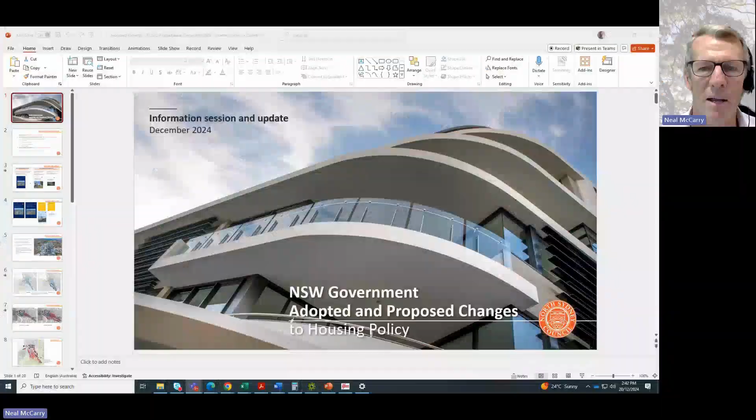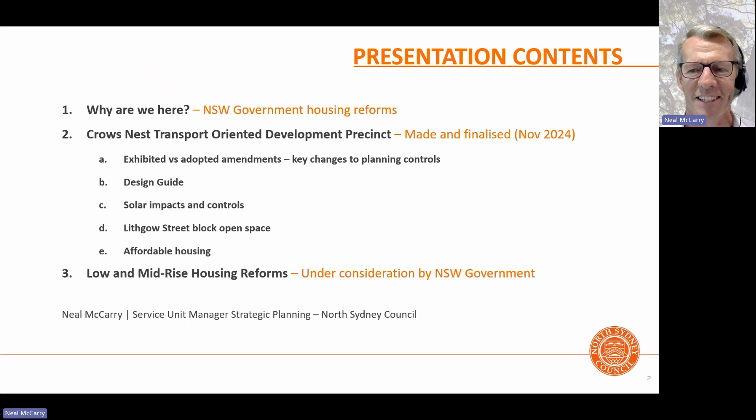During this presentation, I'll be outlining the government's broader housing reforms and focusing on the recent amendments to the planning controls that have been made, covering the headings you can see on your screen now. The team and I are also working on a more detailed analysis of the potential impacts and issues arising from these amendments, which we'll be presenting to a meeting of Council next year. So this presentation is an overview and summary of the changes, and more information and a critique will be available after our analysis is complete. So why are we here?

In 2023, the Commonwealth and states set a target to build 1.2 million homes over the next 5 years. The New South Wales Government committed to delivering a target of 377,000 of those dwellings, with the majority to be provided in metropolitan Sydney. The State Government more recently set a target of 5,900 new dwellings for the North Sydney local government area. As part of this broader program, in December 2023, the Department of Planning introduced the Crow's Nest Transport-Oriented Development Program.

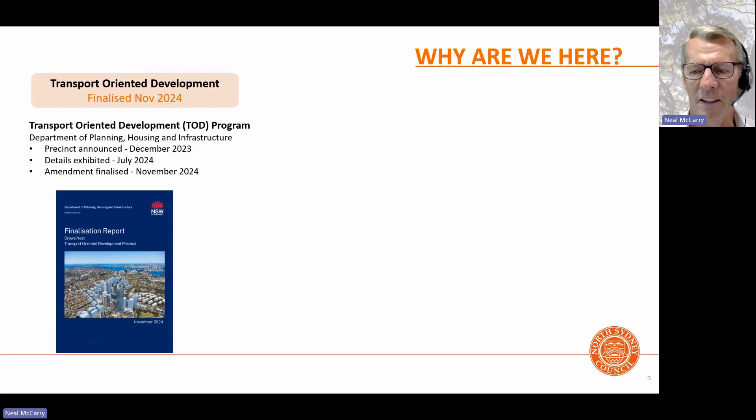And that's the focus of today's presentation, along with a short piece on the low to mid-rise housing reforms that was also introduced.

In August this year, Council endorsed a detailed submission in response to the exhibition of the Crow's Nest Transport-Oriented Development Program. On 27th of November 2024, the State Government's transport program for St Leonards and Crow's Nest came into effect. As a result, amendments have been made to North Sydney Council's local environmental plan, along with our neighbours in Lane Cove and Willoughby Council areas.

The North Sydney Local Environmental Plan is the principal legal document that regulates and controls the scale and type of development that is allowed on a piece of land. It is made up of a written legal instrument and a series of maps.

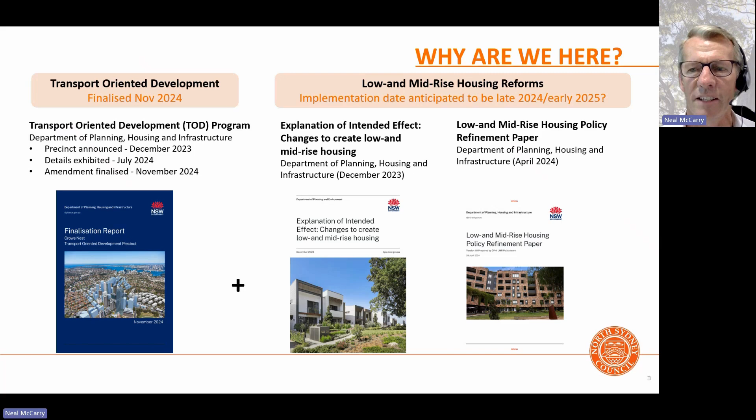Links to these more detailed documents are provided further in this presentation, as well as in the video description and the web page where you're watching this, for those who may be interested.

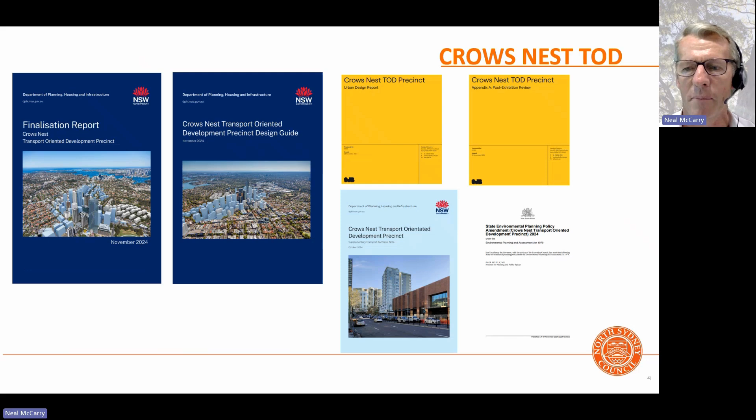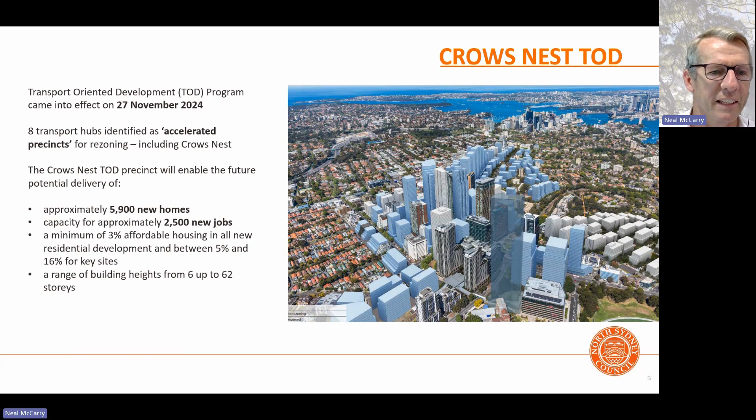This slide contains some high-level numbers and a summary, and these figures also include parts of Lane Cove and Willoughby Council areas. The image you see is a 3D representation of potential built forms that could arise under these planning controls. To get your bearings, this is a view looking from the north, and this taller line of buildings is looking down the Pacific Highway. This graphic shows you the potential built forms and the scale that could arise. Those are the ones largely shown in light blue, and the coloured buildings are ones actually already in place on the ground.

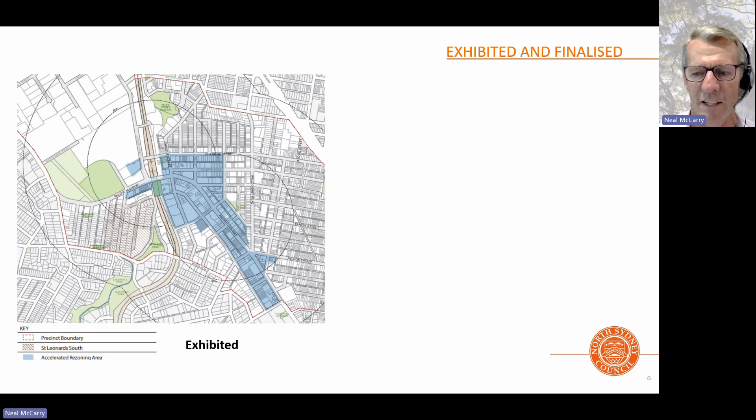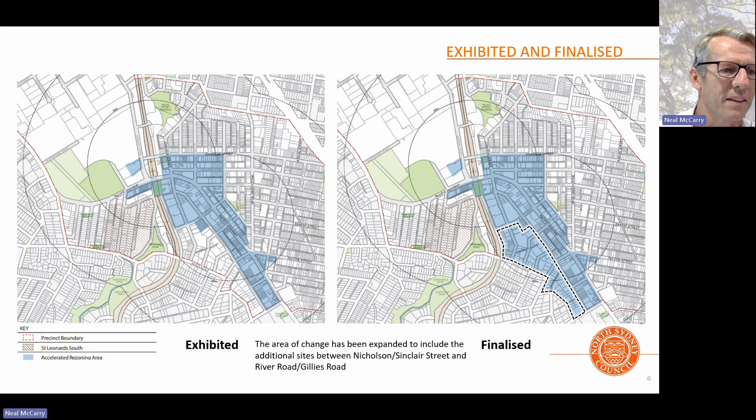The next slide on the left of your screen shows the area shaded light blue that was exhibited as part of these proposed amendments in July and August earlier this year. On the right, you can see the finalised extent, and importantly, this includes, as shown by the dotted line, an additional area that was included following exhibition. This area extends down Oxley Street, down Lithgow Street as far as River Road, and then further south along Gillies as far as Rocklands Road, and then up through Sinclair and Nicholson Streets. So these areas weren't the subject of public exhibition, but were included following the exhibition.

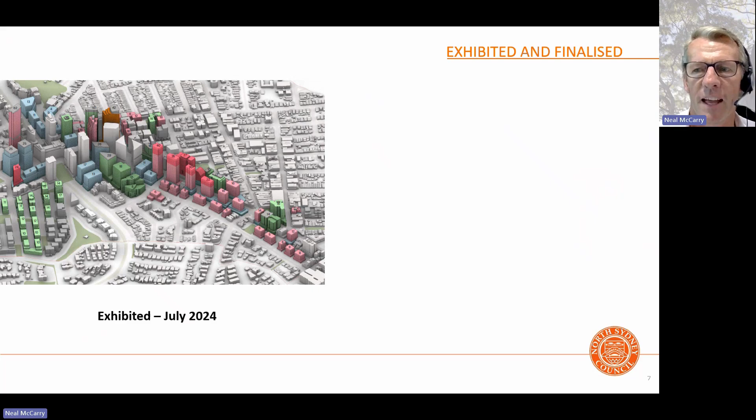This slide on the left contains a snapshot from the Urban Design Report. Again, this is a 3D representation of potential built forms as exhibited that could occur as a result of planning control changes, and to the right is the finalised extent. The numbers, if you can read those - I apologise, they're a bit small, I've got a closer-in slide coming up shortly - show the height of these potential buildings expressed in stories. This image can be found on pages 11 and 12 of the Urban Design Report.

Again, to get your bearings, this is an aerial perspective taken looking towards the northeast, with the Pacific Highway being the corridor of taller towers, where you can hopefully see my cursor moving. The area I mentioned that was included following exhibition, compared to the image on the left, is here - down Lithgow Street, River Road, this full extent - up Shirley and up to Nicholson as well.

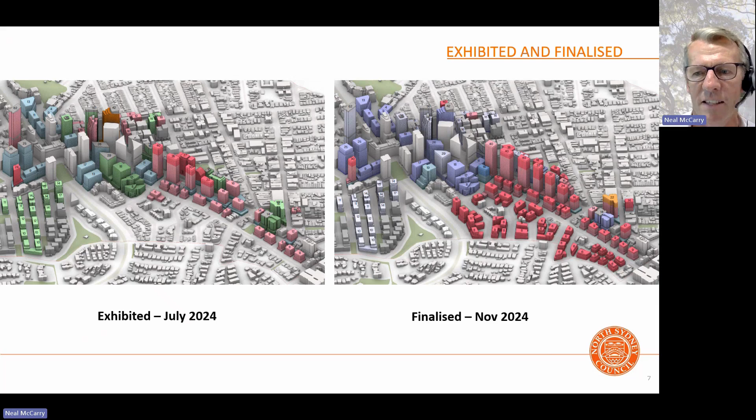As you can see, apart from those areas, a number of the sites also underwent significant building height increases beyond those exhibited. The light pink, if you can see that, is what was exhibited, and then the darker red is the finalised heights that were set as part of this finalisation.

This slide is showing you the building heights. These figures, if you can read them, are expressed in metres. I've included these maps rather than the finalised ones in the local environmental plan itself, because they're a little bit easier to read. But just for absolute clarity, the effect of these amendments has amended North Sydney Council's local environmental plan. We'll provide a link at the end of this presentation and on our website to where you can find those technical maps in the LEP.

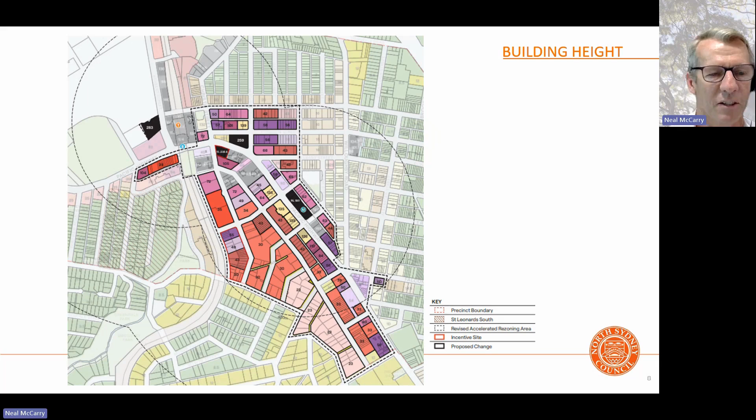This slide is floor space ratio controls that have been implemented. Floor space ratio is a planning term used to control density. It sets a maximum total amount of internal floor space that can be provided on a site, expressed as a ratio based on the site area.

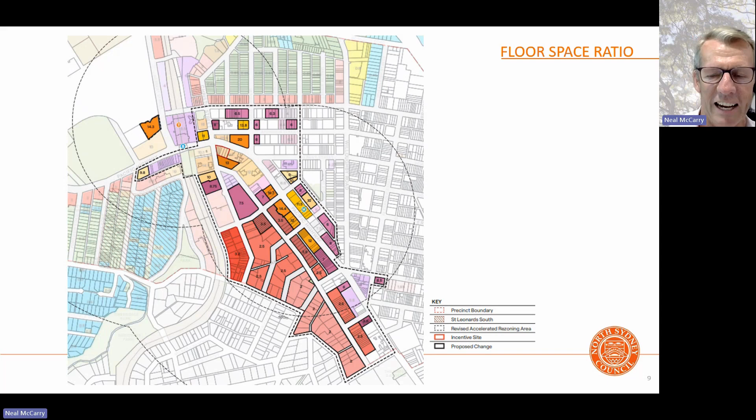So for example, if someone had a 1,000 square metre site area and a floor space ratio of 2.5 to 1 applied, they could potentially achieve a maximum total floor area across the different levels of the building of 2,500 square metres. Similarly, I've included these maps rather than the finalised ones, as they're a little easier to read. The non-residential floor space ratio.

Non-residential floor space ratio is similar to the last slide in concept. However, this relates to the non-residential uses on land in the mixed use zone. So when I say non-residential, I mean things such as shops and offices and that type of thing. This is set as a minimum on these sites, meaning those uses would generally be provided at the lower levels of the building, with residential units above. So just for clarity, these coloured and annotated areas are all the mixed use zones in this precinct.

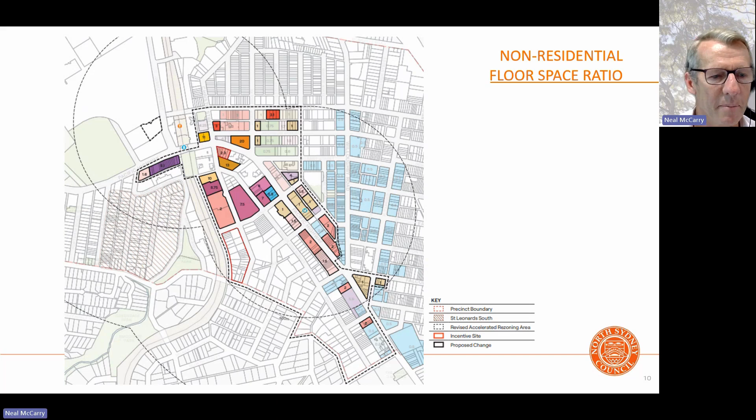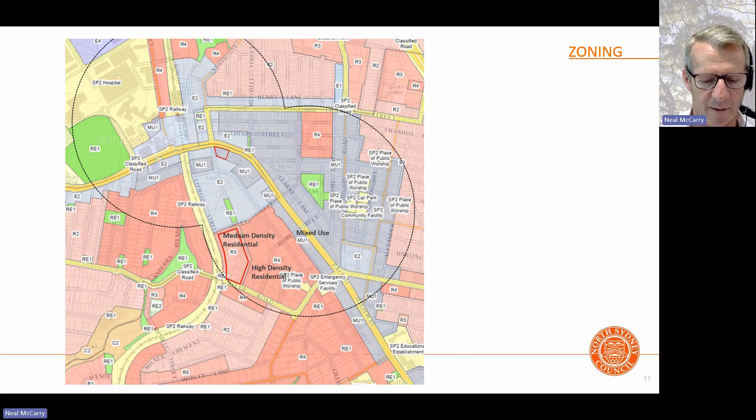Next, we have the zoning map. Apologies for this graphic, it is a little busy, but this is an extract from the amended zoning map in Council's local environmental plan. Most notably, this R4 high density zone is extended to a much greater extent than was exhibited, shown as the darker red zone. The zoning of the majority of the areas as exhibited remained unchanged, such as the mixed use extent, that's the light blue through there. And I'll come back to it, but this block here, circled in red, didn't undergo a zoning change, though there are some specifics I'll talk to shortly.

This slide is showing a zoomed in extract again from the Urban Design Report that the state government released, from page 25 for those who may wish to look at that. This provides a bit more detail and clarity on the degree of change between what was exhibited and finalised. Again, to get your bearings, this is taken from the southwest looking sort of northeast, and the line of tall buildings is that made permissible potentially under these changes, that's the Pacific Highway through there.

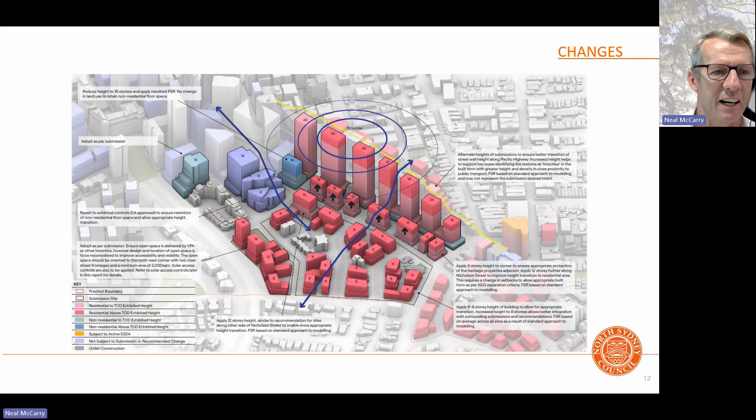And then the area I talked about here, this is Oxley Street, if you can see my cursor, Lithgow Street, River Road, this is going up Shirley, and then this is Nicholson. So that area was all added in as well. Again, the light pink colouring is the heights that were exhibited, and the darker colouring there is what was made following exhibition and finalisation.

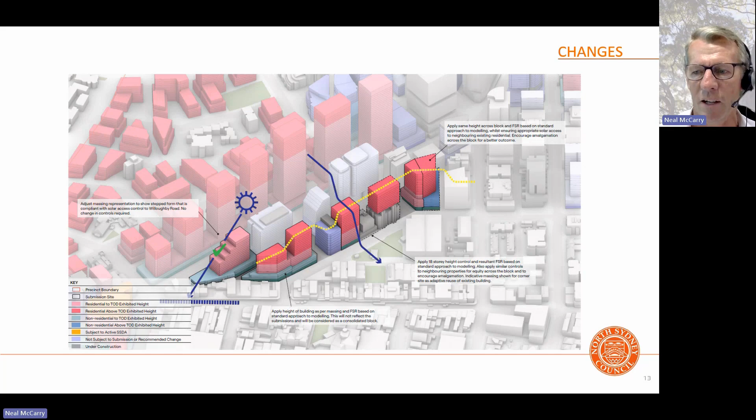Next up, we have an extract from page 33 of the Urban Design Report that provides a bit more detail on the difference between what was exhibited. To get your bearings here, this is a view looking from the southeast, and this taller line of buildings is the same one I just showed you on the Pacific Highway. This purple building here is the new Crow's Nest Metro entry point. These lighter coloured forms here are the potential building forms being progressed over the station by way of an application. The light pink, again same coloration, was what was exhibited, and the red is what may now be permitted under the new building heights that have been included.

The state government, in making these amendments to Council's local environmental plan, also finalised a precinct design guide. The precinct design guide contains numerous more prescriptive provisions to guide the final future built form on individual sites. It has the same effect as Council's current development control plan, but doesn't mirror it by any means. I've listed a few of the things it tries to deal with on the slide. The point I want to make is that the design guide is actually referenced in Council's local environmental plan, and that requires new development to be consistent with these design guide requirements.

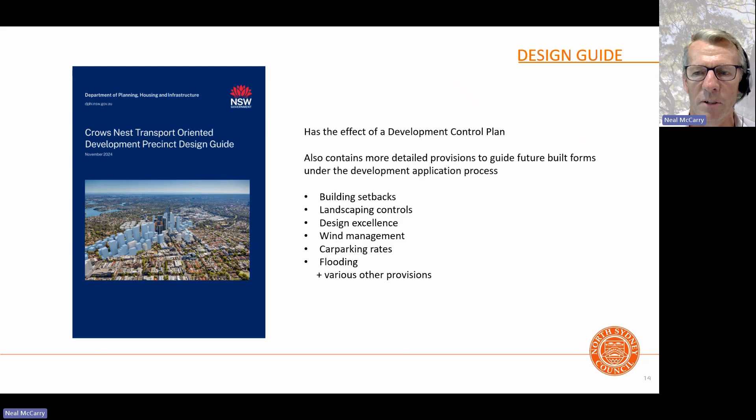One of the key impacts of taller buildings of this nature is the shadows they cast. We don't yet have detailed shadow modelling available, but this diagram is presented to try and illustrate the extent of overshadowing that may arise from some of these taller building heights. If we take this building here as an example, there under the LEP is a height limit of 125 metres assigned, which would accommodate potentially around a 40-storey building.

In midwinter, when the length of the shadow is at its greatest, the shadow length is generally around 3 times the height of the building. So a building located on this site, if developed, could generate a shadow in the morning hours up to 375 metres long, which would bring that shadow right down south of River Road, potentially.

As the sun makes its move through the sky, that shadow would arc around and shorten as the sun gets higher overhead. Similarly, these slightly taller, shorter, and then further shorter buildings would also cast shadows, but of a lesser length.

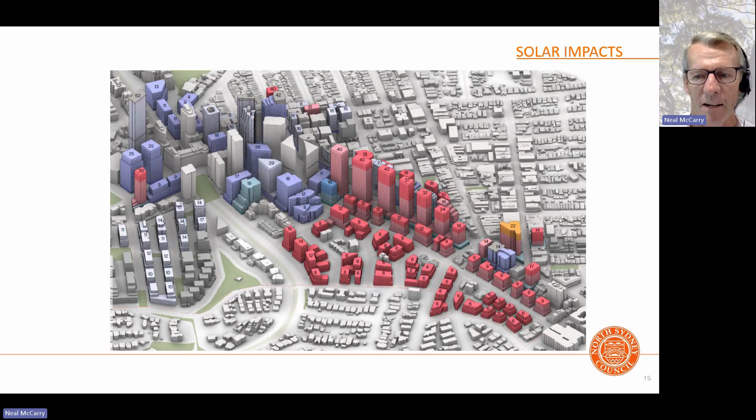This table dealing with solar controls is an extract from the design guide. The left-hand column identifies the area over which some solar protections are applied, and the right column specifies the requirements new developments need to comply with regarding solar access or protection of these areas. You can pause the recording to review these in more detail.

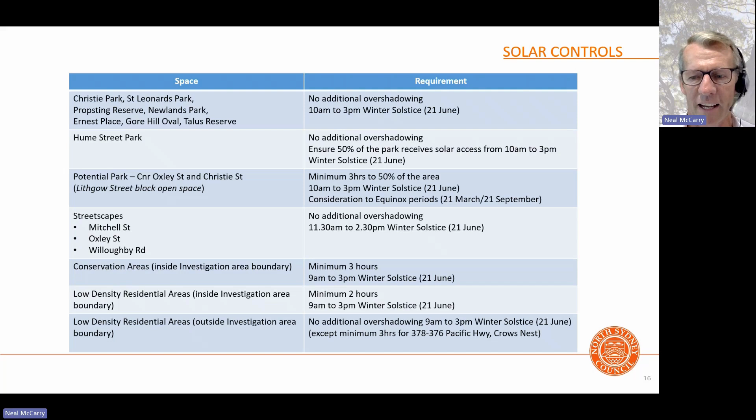Just raising the point, we haven't yet tested these, but the team will be reviewing this along with the modelling of these impacts in more detail over the coming weeks.

This slide is also an extract from the design guide issued as part of the finalisation, showing the block of land bound by Lithgow Street, River Road, Christie Street and Oxley Street. With a combination of provisions within the local environmental plan, termed incentive provisions, as well as specifications within this design guide, one of the aims of these amendments is to deliver a new area of open space available to the public of at least 2,000 square metres.

The built forms, shown in blue outlines, are indicative. This amendment is simply a planning control and doesn't have the effect of approving an actual building. However, the heights annotated on this diagram show the maximum height that could potentially be achieved on these parcels of land within this street block.

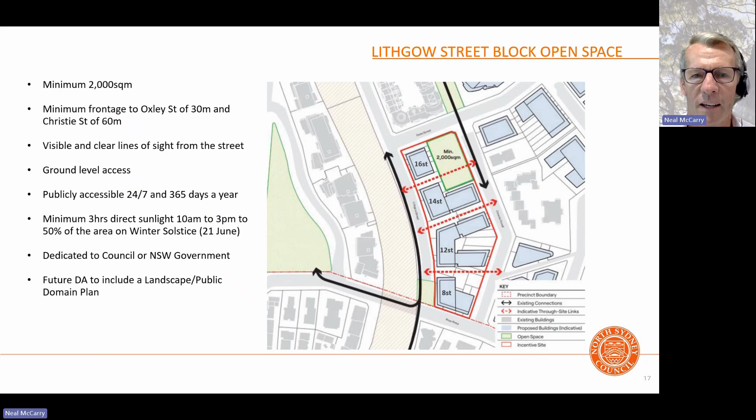One of the government's cited objectives of the transport-oriented development program was to increase the supply of affordable housing. Affordable housing is housing priced so that households with low to moderate incomes can afford it, as well as meet other basic living costs. It's usually available for rent at a discount to the market rent for similar properties in the area, and quite a number of eligibility criteria apply.

The area shown in this map hatched in blue will be required to provide a minimum of 3% of all new development as affordable housing. Some sites, as marked up there, have a higher requirement for affordable housing, a higher percentage to be delivered for any new development as affordable housing.

So those are a summary of some of the key elements of the recent changes to Council's planning controls that I hope have provided a level of clarification in the short term.

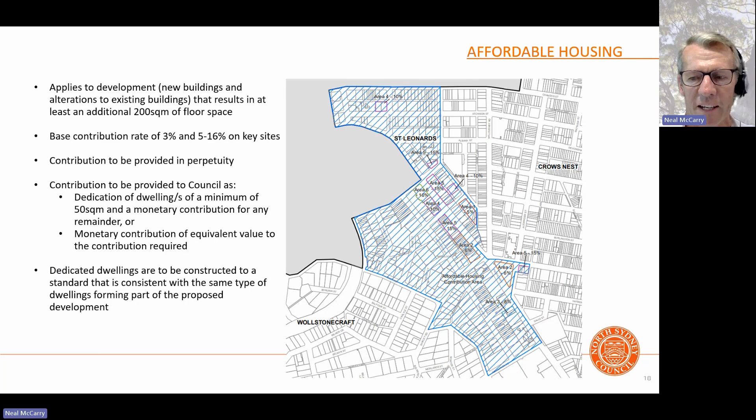As I mentioned earlier, the low and mid-rise housing reforms will also result in changes to development controls in many areas of the North Sydney local government area. This slide indicates the location of the existing rail and metro station entry points.

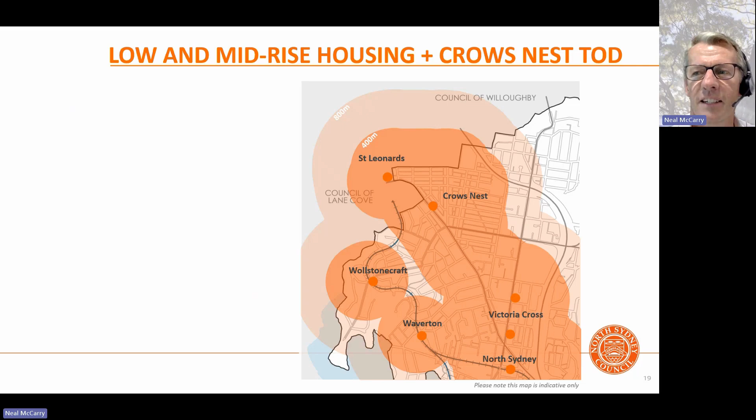The proposed reforms will likely allow an increased level of development in areas within both a 400-metre walking catchment and an 800-metre walking catchment. These shaded areas are measured as the crow flies, so will likely be slightly different depending on the actual walking distance.

Some of you may recall or may have attended the public meeting we had in early February this year, where there was a more detailed presentation on these proposed reforms. We've included a link to that presentation on this webpage.

The extent of potential change, in simple terms, is dependent on the site's distance from the station, as well as the existing zoning.

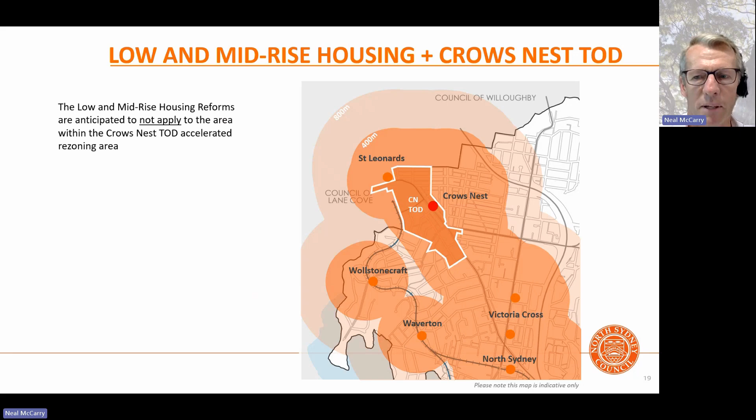I've now overlaid, for clarity, the Crows Nest TOD area we've been focusing on in this presentation. Those changes have now come into place and have amended Council's LEP. The broader low and mid-rise reforms were advised to be happening by the end of 2024, but now appear likely to occur sometime in 2025. We understand they won't apply to the area we've focused on today.